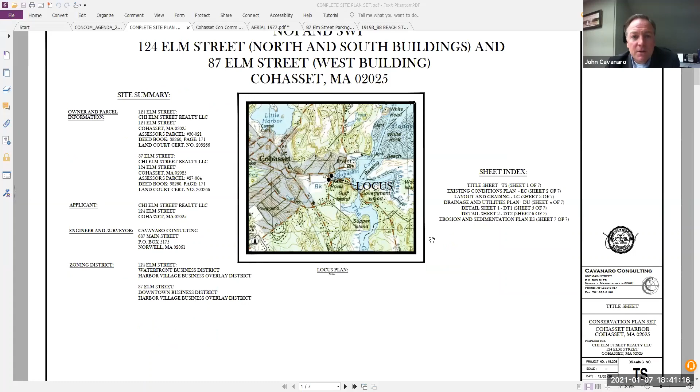Thank you very much, Adam. So, Jeff, if you'll allow me, I'm going to share my screen and pull up the site plans. I assume everybody can see that okay? So I'm going to walk through the site now.

Before we begin, let me ask you one question: would you prefer that we held off our questions until you finished your presentation? Your presentation may get thrown about quite a bit if we throw questions at you whenever they pop up. How would you like to play that? I would appreciate that, Mr. Chairman, if that's the will of the board.

That's fine. What I'll do is go through the plans, and then I'll also ask Jen to go through the landscape plan. After that, we'll return to myself, Adam, or anybody on the team for questions and answers, if that's okay. Okay, I'll walk through it.

Sorry to interrupt you, Justin Pimpare. Just a quick procedural question: I assume the set of plans in front of us tonight are the latest set of plans also in front of the planning board. I haven't been following that whatsoever, but I assume this plan is the latest and greatest plan in front of all boards at this time.

This is the latest and greatest plan that's been prepared with respect to conservation. Principally, almost all of it has been in front of the planning board and the Board of Appeals, but those plans were submitted prior to this application being submitted. Some of it has probably been updated since, because this application was submitted after the fact of those two, but generally they're conceptually the same as far as the proposed work.

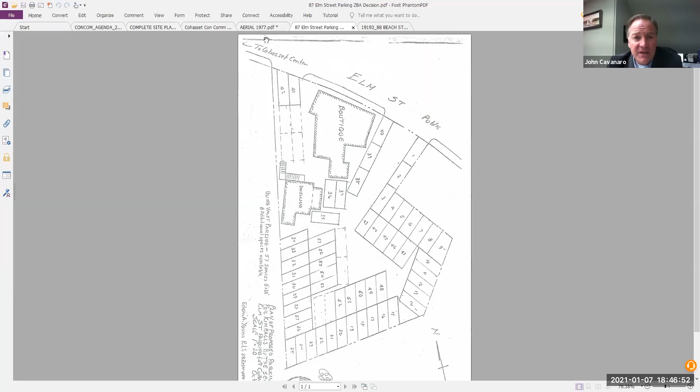In researching the active special permits, we found that 87 has had a parking plan put together to identify the capacity of its parking for the hotel and the adjacent properties under common ownership. This is the current parking plan that's part of the special permit associated with 124 Elm, because these properties have been together for quite some time, and it explains the configuration of what's out here.

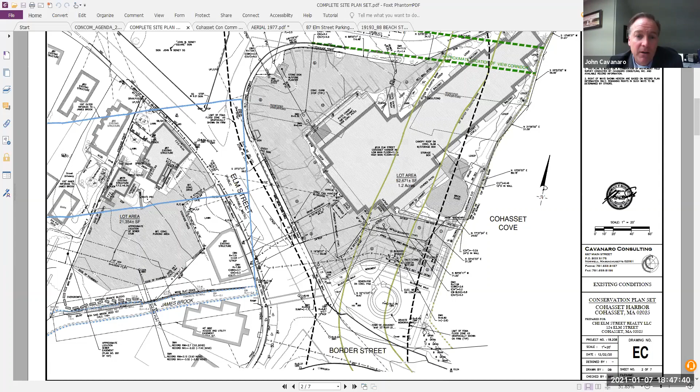So that's the existing facility. As Adam said, this is a redevelopment project. These are two highly developed, highly paved, large capacity parking lots with mixed-use buildings.

What we're proposing, I'll show a plan that's a little busy, then move to less busy plans. I wanted to show for perspective the overlay of the existing buildings with the proposed buildings on the same plan, to show the real crux of what this proposal is looking to solve and create—leaving the property in better shape environmentally, functionally, for public space, and for stormwater management.

Right now we have an existing building that primarily occupies the 100-foot buffer zone. You can see this is the 100-foot buffer zone, and the majority of the building sits within that footprint. A large portion is within the 50-foot buffer to the coastal bank.

One of the driving factors with this village overlay district, created through recent town meeting, was to create a mixed-use environment here, and also—one of the tenets of the bylaw change—was to open up a view corridor along Margin Street, which is currently blocked by the existing building footprint. So the idea was that anything developed here should keep in mind that an open view corridor to the ocean would be part of the proposal, and that drove the layout of some of these buildings.

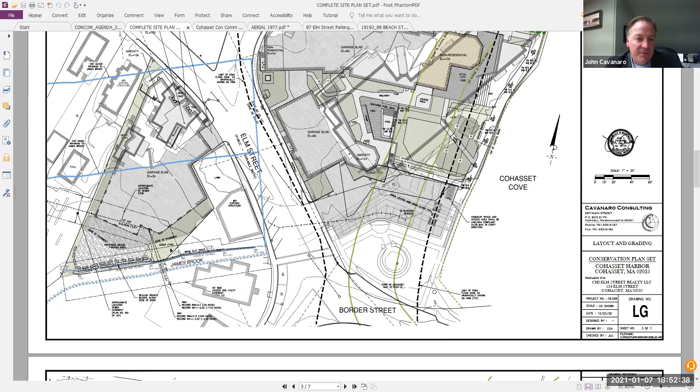So all of this pavement is now uncovered, which provides the ability for pollutants to roll down into the James Brook. Similar to 124, we'll be putting all of the parking for the residential units under a roof, with only a few parking spaces in the back of the property to maximize parking—not to the extent I showed you in that special permit drawing with the valet—but we still want to provide parking for the mixed-use commercial tenants and activity on both properties.

So what we're doing is taking advantage of some of this back area, but still pulling back the pavement on both the westerly and easterly lines and adding landscape, which Jen will talk about in more detail in a minute. So the proposal at both sides has essentially been to reduce the building footprint at 124, reduce the impervious surface, reduce the amount of open air parking, and increase the amount of open space and landscape.

At 87, we are increasing the building footprint, but substantially reducing the amount of open air pavement. So we're essentially trading what we call polluted runoff with clean runoff. Instead of having vehicles parking outside with the potential for contaminants to wash down into the James Brook, we're eliminating that impervious surface and putting in roof with crushed stone at the back end of the lot to provide some pervious surface.

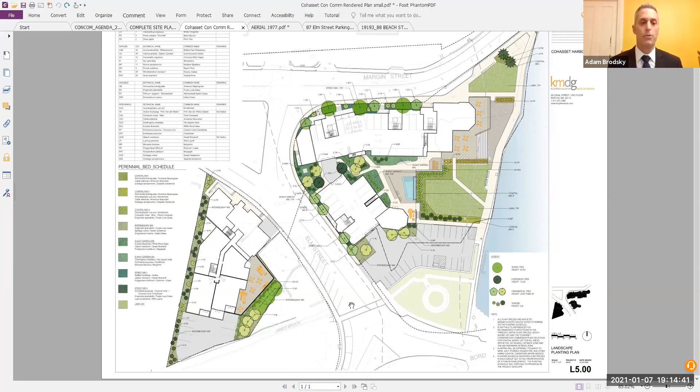This is historic filling from the 1800s and early 1900s, and it's been there decades and decades. There's still loads of creosoted logs and piles in here. I just wonder what impact that might have on the harbor once it starts to get disturbed, once the loading is changed on the property. Are you going to be lighter or heavier? Are you going to see some compaction? What are the consequences of that?

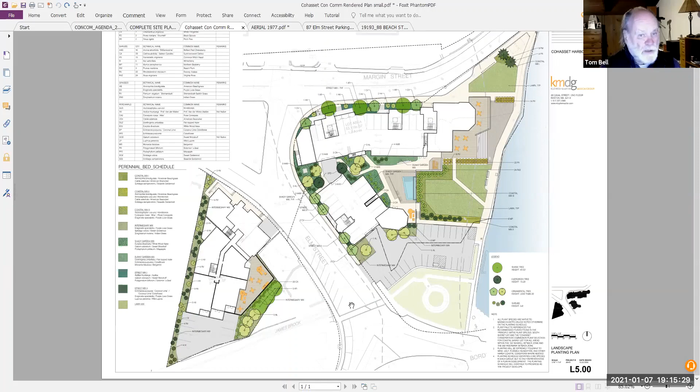Do you have a geotechnical study of this by any chance? Yes, a geotechnical report was prepared. Great, so you must know something about the subsurface. Well, as I mentioned, there were borings done around the existing parking lot, not the building, since it takes up a large portion of the lot, as you saw on the previous plan. So what they found was actually ledge around the parking lot. Ledge or stone fill? How do you know? No, it was a refusal — they hit some large refusal.

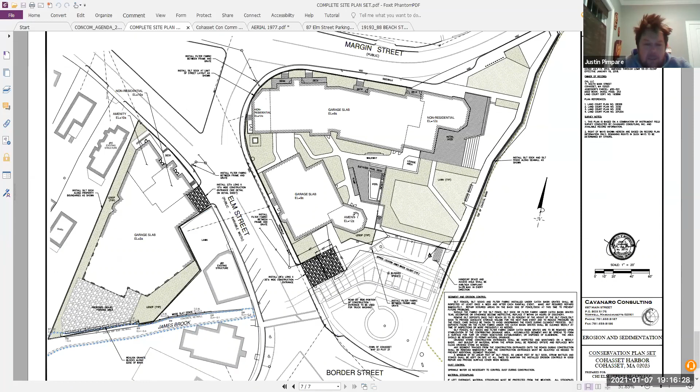This is Justin Pimpare. I had a question on the elevations here. As you mentioned, there were some test borings done around the parking lot. Maybe we could switch off this planting plan and go back to one of the plans that talks about the garage elevation. I believe looking at the old plan — I can't read this because it's so far away — but it looks like the garage slab was at about 9 feet.

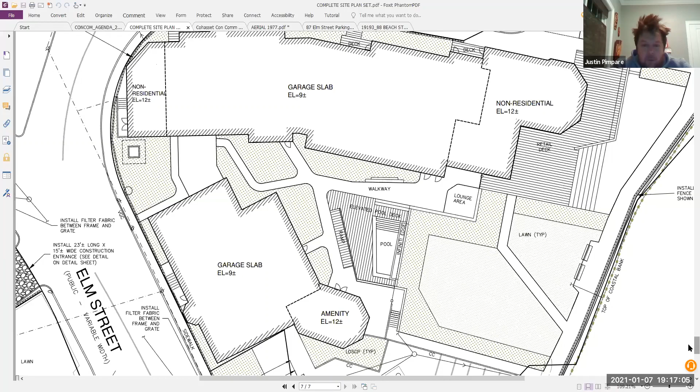So as I understand looking at the plan here, during the demolition of the project and the removal of the current building, which now has a basement, there's going to be some excavation done, and clearly there's going to be a need for some fill to come in. Do you know what is the actual elevation of the top of the walkway now, or the existing brick patio area that's currently in place? My question is how much fill will be needed underneath that garage slab at 9 feet, and what is the actual current elevation now?

Again, as I assume, there are no basements — the only excavation really is for the removal of the basement area after the demolition of the building. Is that correct? That is correct. So the garage slab elevation is going to be closely matching the existing ground elevation. The existing ground of the parking lot ranges, but essentially the grade over at the town parking lot will remain the same.

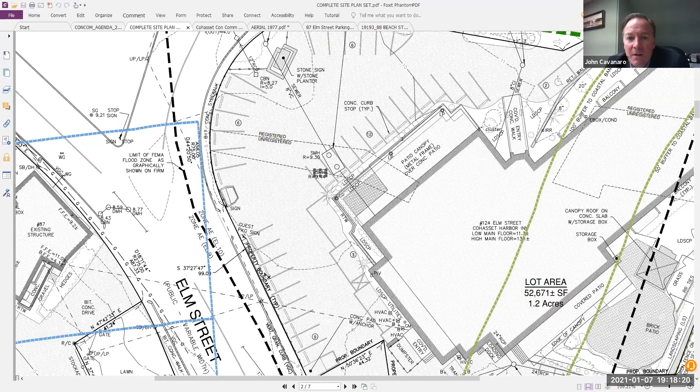Okay, so no changes to that. The curb cut will remain the same. And then as we work our way up around the property, this comes up in elevation to elevation 9 — this is where the top of the garage slab will be, pretty much sitting on the existing grade as far as elevation. So there'll be a cut on this side because the ground slopes up as it comes up Margin Street, so this will be a little bit of a cut.

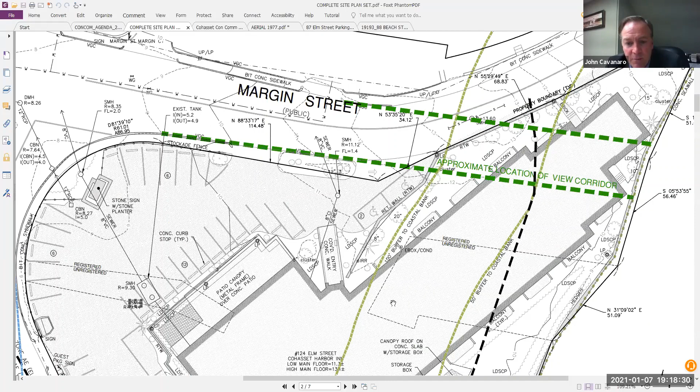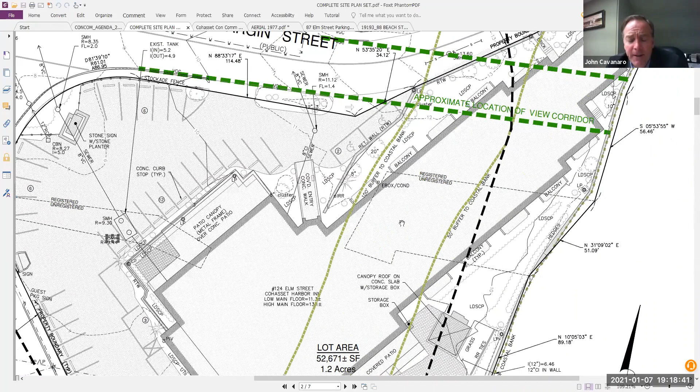This will be pretty much at grade, so there's not a lot of fill being brought on site, other than for when we take the building out. Let me back up — this grading, I just want to show some grading. So although there's a need for some fill to fill in the actual basement area, you're really not even going to have enough. You can't use your cut for your fill because the cut is mainly 4 inches or so of pavement, which I assume will be completely hauled off site, and then you're almost down to grade for some crushed stone or crushed gravel to lay the slab.

This is where the grade will be coming up, this is where the existing building is. So we'll be bringing the grade up and have the walkway essentially level. It'll pitch slightly away from the coastal bank, and then the grades will come up to match the street elevation, tying in to the existing road network and from the seawall. So we're not talking about dramatic changes — it's really just to meet. We're keeping the garage slab pretty much at the grade of the existing parking lot, and we'll just be grading from the seawall to match the first floor elevations of these, which are above the flood.

Right. And over here, we're sort of doing the same thing. We're keeping the garage slab pretty close to what the existing parking lot is, and it'll slope up to meet Elm Street. But there's no fill or cut going on back in here at all.

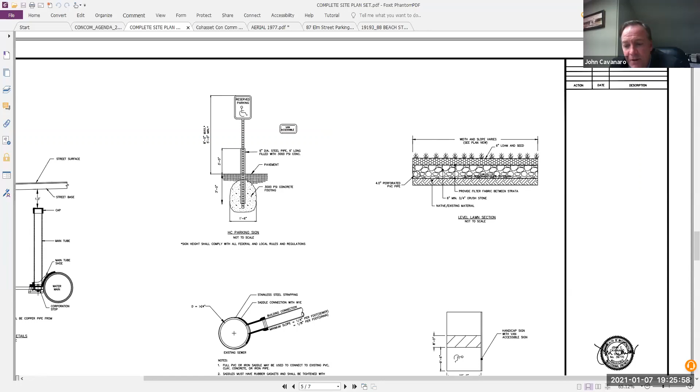So during heavy rain events, it doesn't become a slushy field. Exactly, and here's the level lawn section we've added, with lawn on top, and then crushed stone with a perforated pipe that will drain this area.

When this fills up, it will overflow into the drainage system on site that collects and connects to the existing 12-inch outlet that daylights into the wall. So we're not adding any new outlets to the wall, we're just reconfiguring the existing drainage to get it there, and adding this infiltration area to provide a little bit more.

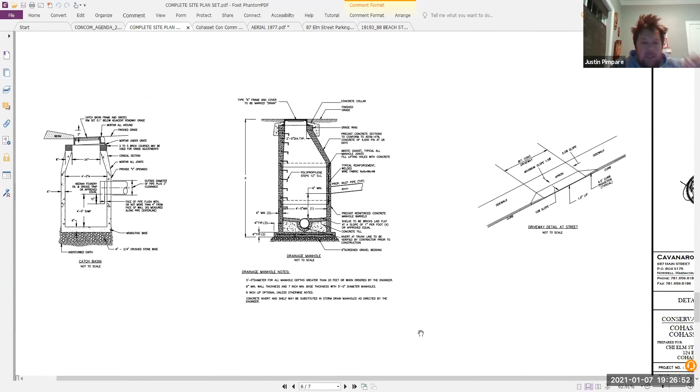You also had a schematic of the drainage manholes, and I had some questions on that. Sure. If I'm reading that correctly, is that a 5-foot diameter manhole at its peak, and how deep is it? It's 4 feet.

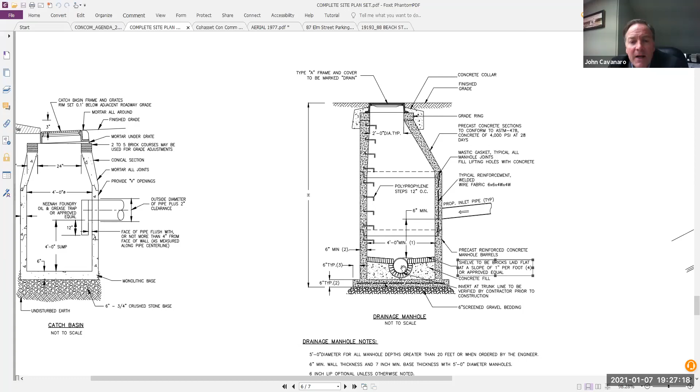So an individual could actually get down in there if need be? Yes, that's hence the manhole. And how deep are those? Well, they vary, it depends on where the specific drain elevation is, where the invert is. But these are typically about 6 feet in depth, though they vary. Catch basins can be shallower, it depends on where the outlet drains are.

So are those existing drainage manholes now? No, this is a detail for a new drain manhole, for the new drain connections we're proposing on site to collect the network of piping.

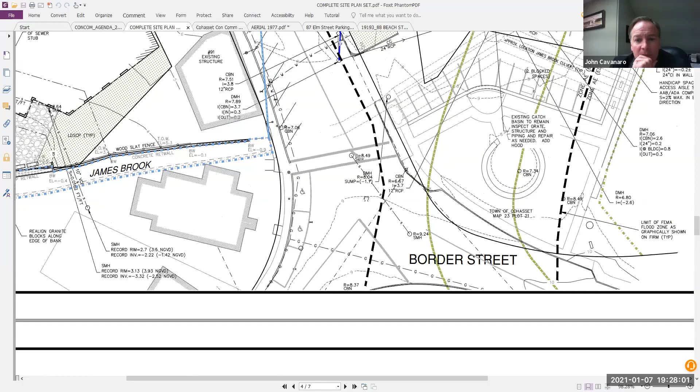Can you just describe on the plan where exactly some of those manholes are? Yep. So we'll have one here and here, these are the DMHs, the drain manholes.

So we'll have a series of small inlets to capture runoff that comes off of this walkway. We'll pick that up with some small area drains, and then connect the roof drainage to that so we're not daylighting a lot of roof drainage into these public areas. We want to connect the clean roof and put it into a pipe network.

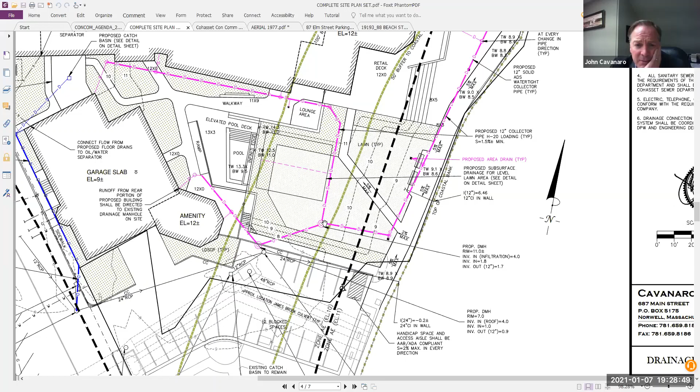Where we have pipes that connect with one another, that's where you want a manhole, so you have a good clean junction chamber that you can access and clean out if necessary, and get access to the pipe networks. You don't want to link these up with catch basins when you can avoid it, so at the primary junctions you put manholes.

So you're saying the drainage system in purple is collecting clean runoff. Yeah, there's no pavement where we have vehicular traffic or anything like that.

So to switch gears a little bit to talk about the pavement and the manholes or catch basins in the pavement area, can you talk about that? Sure. There's an existing catch basin here that we've identified, we want to make sure that's adequate.

Inspect that, make sure there's a hood for stormwater water quality. Anything new that we put in gets a hood to provide an oil water separator mechanism. We do have one catch basin here, in this open air area between the two buildings that connects the parking, so we'll have a catch basin here.

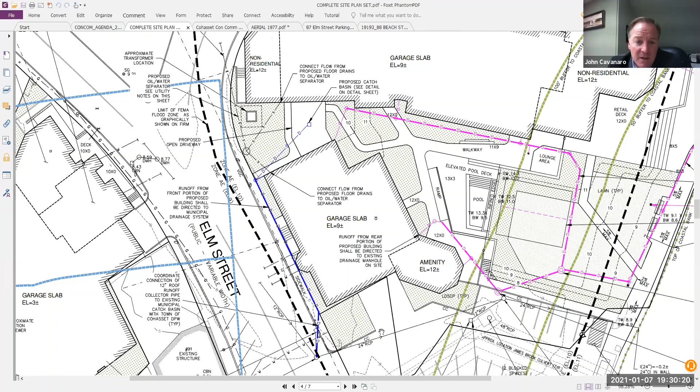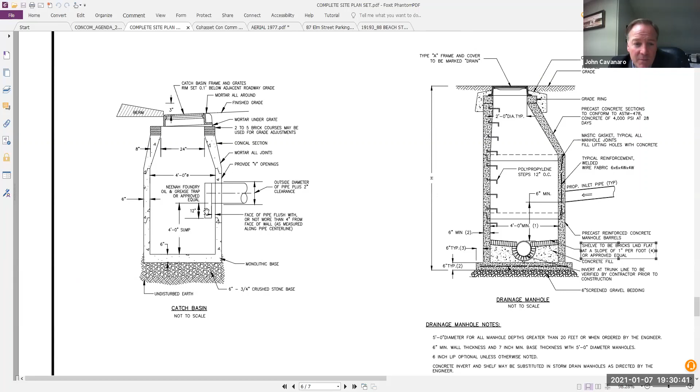The catch basins we've designed are deep sump catch basins, so they have a 4-foot sump. It's called a deep sump catch basin, and these are the hoods. So water flows in, sediment collects—that's called primary treatment—and then as the water level rises, it drains into the pipe.

But if there's any level of grit, grime, or oil, that will float to the top, and the clean water will go up the hood and drain out the pipe. That's the reason you have these hoods on an outlet to a drain structure. So you have the sedimentation that collects here, and the oil.

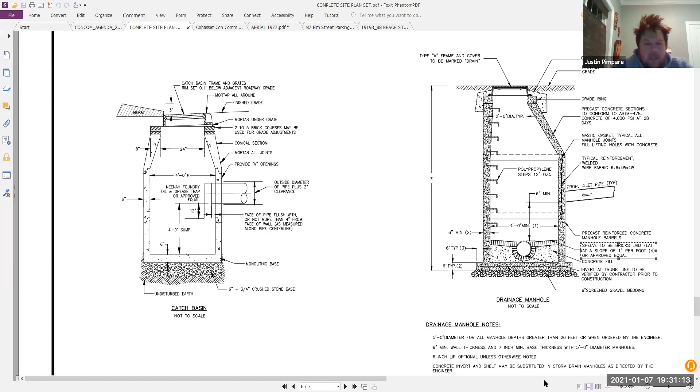Would you happen to have an O&M plan for something like that, or is there only a plan that kicks in when there's catastrophic failure and there's backup and/or overflow?

No, so we have an operation and maintenance plan that's submitted as part of the stormwater permit, but all these structures will need to be maintained and cleaned out on a regular basis. Just like a small outdoor parking lot, they need to be swept and maintained, which they will be. The benefit of mixed use projects is that a lot of attention is paid to the facilities because you have both residents and non-residential use.

I guess sticking with drainage, you mentioned the oil water separator, but I also saw on the plan an oil and grease trap. It looked like floor drains. Can you show that and describe it a little bit? Yeah, so for anything inside, any drainage collected inside a roofed structure gets sent to an oil water separator, separate from what you'd have on a catch basin for an open air structure, which drains to the municipal sewer. So that doesn't get collected and drained to the stormwater system, it gets more treatment and is sent to the municipal sewer. So the garage slab floor drains go to the oil water separator and then off to the municipal system.

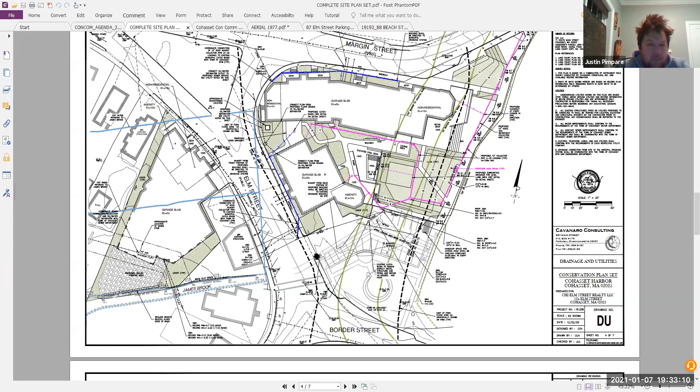Correct. Is that the same for across the street as well? Yes, if you have any drains inside a building. Is that on the plan across the street? I say across the street so it's easier for me to reference. There, where your cursor is, correct? Yeah, there's a sewer connection here that would get connected into this. Can you blow that up a little bit, John? Sorry, it's just hard to see there.

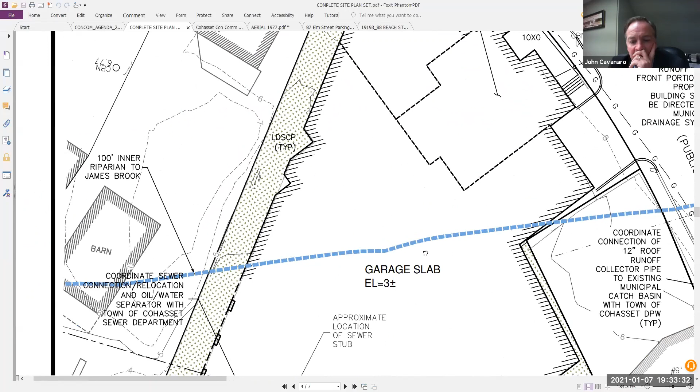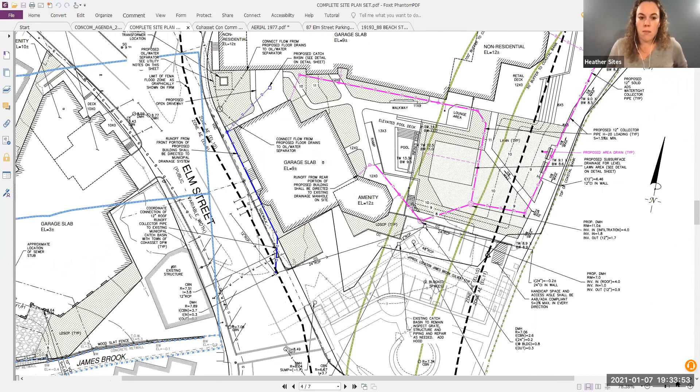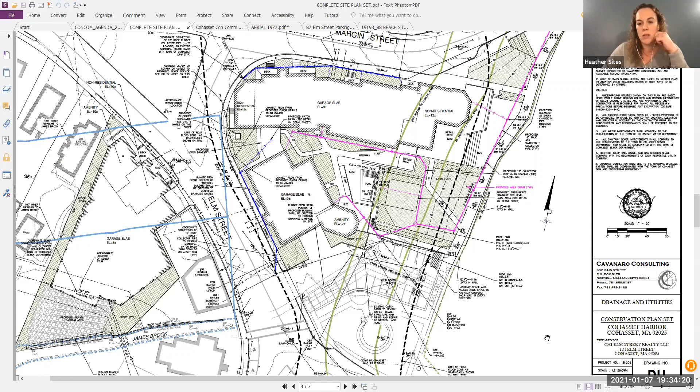John, regarding the stormwater plan, I know you mentioned Weston Sampson peer reviewed it before the planning board. Is the version of the stormwater plan and report submitted to the Conservation Commission pre-peer review or post-peer review? Post-peer review. Okay, excellent, so you have the most current version. Would there be any way to get the Conservation Commission a copy of the Weston Sampson peer review memos or letters? Sure. Okay, yeah, because I think it would be helpful. We certainly don't need to relitigate anything that's already been discussed or reviewed, but it would be helpful to have that information to look at.

Did I hear the word litigate? I hope I didn't hear the word litigate. I can't help it, it's part of the natural... It's part of your character now.

Exactly. John, can I ask you a question, getting off all the sewers and all that? You and I have worked together for 3 years, and I've never heard of something called a degraded area. That's a new term you're throwing here that I haven't run into before. What is that? It's really a term associated with working in a riverfront area, essentially synonymous with redevelopment. So this is a redevelopment project because we're working in areas that have already been developed or degraded. It refers to the property over at 87 Elm Street. As we talked about earlier, this has historically been a parking lot. So we don't have a virgin salt meadow, we don't have a field of trees, we have...

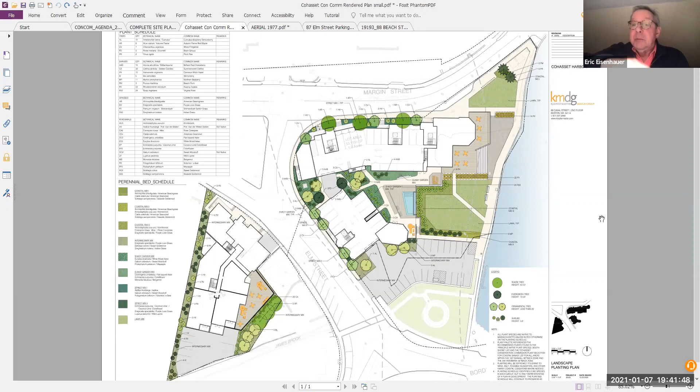Various things have taken place behind it and on top of it, John, but the wall is there, has resisted and put up with hurricanes and high waters and everything else—so it's a solid thing. And our project to put in a salt marsh grass frontage, which we thought was what was originally there, like you find in a lot of harbors—we couldn't find any evidence there was any salt marsh in this area, because it's probably been pushed way back.

John, we've talked about the unknowns with the excavation, which is obvious with most projects. Is there a demolition plan in place, or an excavation plan, construction plan—I guess I'll call it a demo plan for the project here? So nothing different than what's in this package—there's not a demolition plan per se. Is that normal, John, not to have one? Well, I guess every project varies. I'm sure with the final building permit plan set there'll be more details, and that will likely include a demolition plan.

I would assume that all of the pavement and building structure, et cetera, is going to be hauled off-site to a location. So I think it would be prudent to have some type of demo plan. It doesn't need to be elaborate, but some form of a demolition plan to ensure that the digging, the excavation, et cetera, is done accordingly and is hauled away, trucked away, in compliance with wherever it's going. I don't need to know exactly where it's going, but it would be good to have a demo plan on site.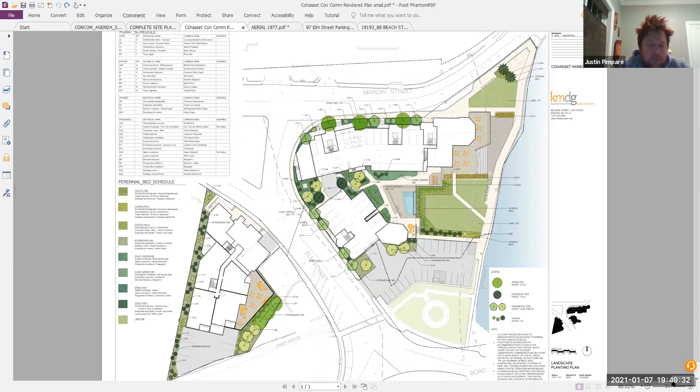And then my other question was with respect to the planting plan, going back to Jennifer here. Thank you for the in-depth drawing and the color coordination, etc. My question is about the planting size for some of the trees - I didn't see that mentioned. I see the different species, which is wonderful, but is there something with respect to size, whether it be 1 inch caliper, 2 inch caliper, 8 feet, 10 feet as far as height goes, etc.?

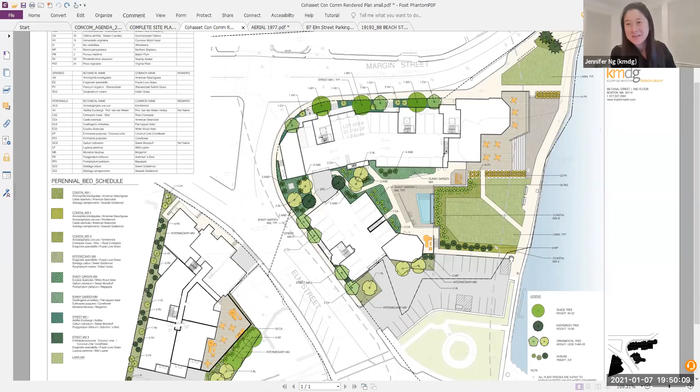So I'll throw that out to the landscape architect. We can certainly circle back with that information - we didn't provide that in this round. I have some desires for size, but should probably talk with Ted and George about it before committing publicly. I think in the hope of moving this project along, plant sizes and plant quantities are important. Sure, of course.

John, two other items I think would also help with this. I do think the seawall is an important feature here, and it seems that concrete extension is just something they put in for security or whatever - maybe they were getting floods at some time, I'm not sure. But it would be useful to see a couple spot elevations at the top of the seawall itself, not the extension, but the historic seawall, so that we can see how that relates to the project overall.

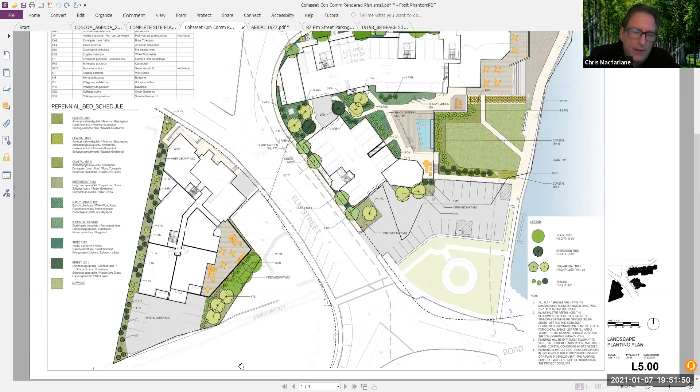The other thing is the parking at the rear of 87. The planting plan shows the spaces, you showed us kind of an overall layout, but it is concerning that although there may have been a time when the asphalt went down to the edge, we now have a condition where you have overgrowth down there. I'm not sure whether or not there's asphalt under it or not, but it does go right to the edge of James Brook.

I think it's worth understanding more how that particular area figures into the overall parking scheme. Obviously from my perspective, the least you can do in that area, the better. So if you can show us a layout of how the parking works there, so we have a better understanding of exactly what you're trying to accomplish.

Okay, they are shown in this plan, but we can further articulate that so that it's clear. And if you just slide down again - let's just call it 1, 2, 3, 4, 5 - 5 on the one side, 2 on the other. So correct, do those 7 spaces, are those required to meet the parking requirements for this project?

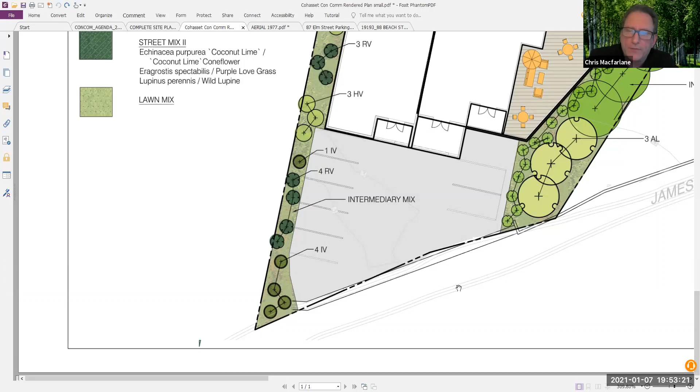Yes, these are commercial spaces that meet our demand for the overall project. I'm sorry, when you say commercial spaces, what do you mean by that? So these are spaces that will be used - the spaces inside the building are for the residents, there's one residential space outside in this area, and the rest will be used for the non-residential use, so the commercial use.

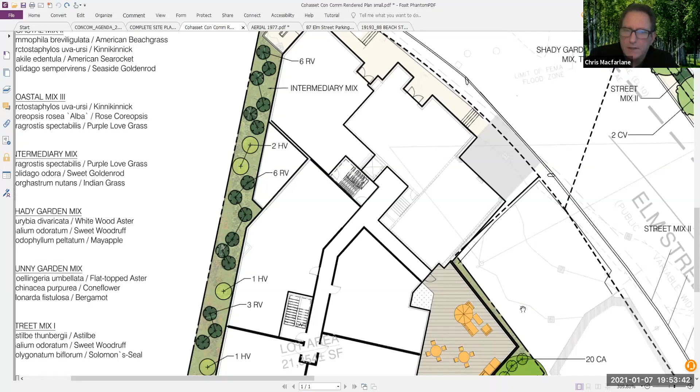Is this parking one story below street level? Yes, not even a full story, but it's pretty much at grade what's there today, but it's below the street level. Well, it's quite a bit below street level, right? Well, it's 5 feet.

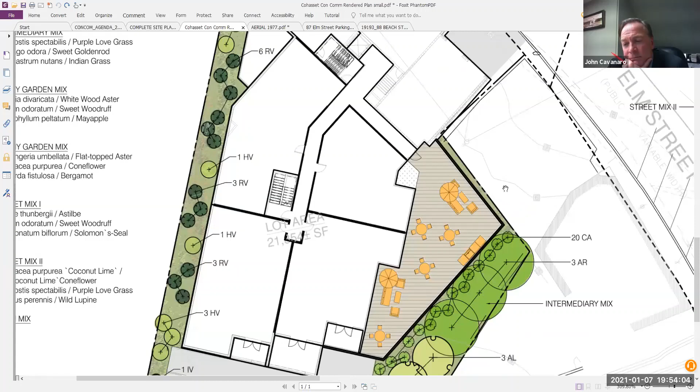And is that parking coupled with the parking that's shown in the street, or is what's in the street not part of that count? No, nothing in the street we can use for the count. So you're saying you're required to have 1, 2, 3, 4, 5, 6, 7 spaces for this commercial development? That's correct, 1, 2, 3, 4, 5, 6, 7 spaces. Yeah, but you said 1 was residential. Right, but it's all part of the parking count. I was just specifically saying what these spaces are designated for, but these spaces are all part of our overall parking count. Mm-hmm, so we need these spaces. Okay.

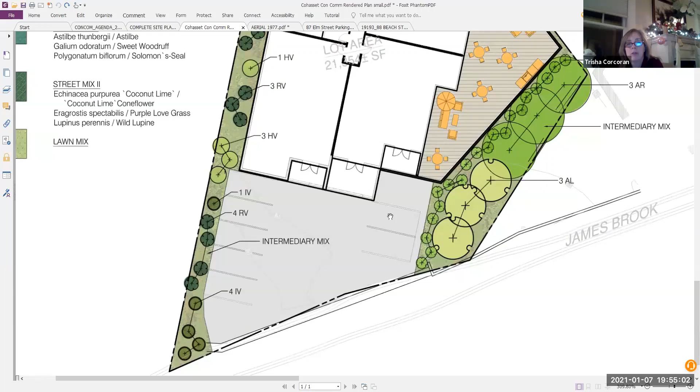John, I have one question just for my understanding of the project. From James Brook, you said it's diverted underneath the street, going over to the gate under the parking lot on Elm. And the parking lot is the public parking lot that it's underneath, is that right?

Both, actually. This is the property line that goes through - this is the public side, this is the private side, but it's essentially a shared parking lot. Okay, that's what I wasn't understanding.

And is that getting expanded more than it is currently? It's hard without seeing - we're adding a couple of spaces to this, but essentially we're keeping this parking the way it is, and these spaces are all there. We're adding a couple spaces to the end.

Okay. And how is it diverted underneath? What is the structure that's diverting the brook under? Culvert, I guess - there are 2 large concrete culverts, essentially large concrete pipes that carry the water underneath the street and to the tide gate structure.

Thank you. So John, is that just one parking place with a handicap, with the striped area being a handicap unloading area, or is that a space as well? That's a space as well.

This is probably the best, just to zoom into this parking. John, I will applaud you for putting in the sign for the handicap spot in the schematic, mentioning that the actual sign will be set in a 3,000 PSI concrete footing. So thank you for that.

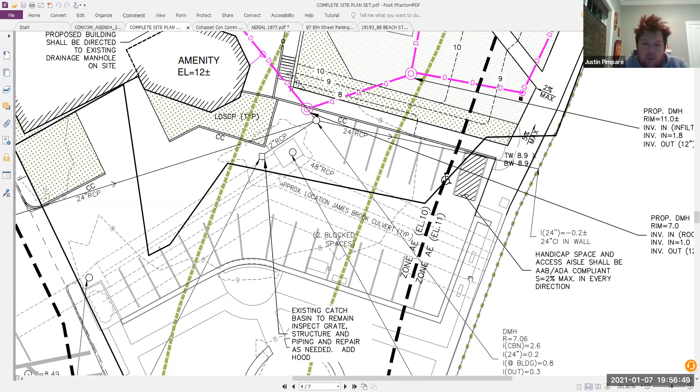You're welcome. So there's no handicap spot over here today, so we're adding a handicap accessible spot here. So that's what the striping is. These 2 spaces over here are taken up because they're generators.

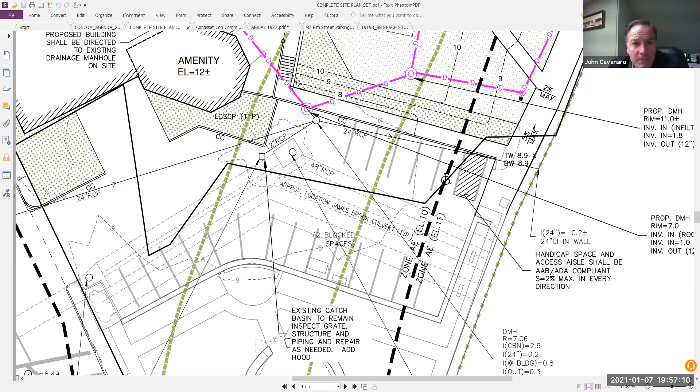I'm going to go back because sometimes these plans are... Are the generators going to stay in the area as is? Yes. Okay.

Even though that space is bisected by the property line, that particular space is part of your parking count? Yes, the space is. Is there an agreement with the town for that?

So the town is aware - before we started this project, the selectmen were made aware that the town right now doesn't have an easement over this private property for the James Brook and other use. They essentially don't have access legally to these spaces. So it's an agreement on easements, and this was voted on by the selectmen, I think it may even have gone to town meeting, that an agreement will take place between these two parties to work out access between these two lots.

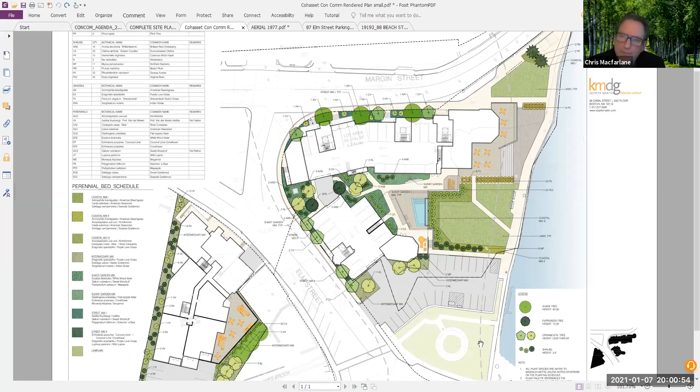No, it's not 5:30. We could attempt 6 o'clock, but right now I don't have enough information to decide how long this is going to go for.

I think for the moment, all we're legally required to do is continue the hearing to a certain date. So if we continue the hearing to the 21st, I'd leave it up to Angela and or Jeff to discuss with the commissioners on a starting time, but to throw that out there, it would be an early starting time, potentially 5:45, 6 o'clock. That'd be my recommendation.

Okay, and we'll be meeting on Tuesday at 8 o'clock, I believe, in front of the hotel. John? Yes. Jeff? Yes, Tuesday morning at 8 a.m. Okay, great. Anything else, John?

That's it. So we'll plan for a site visit next Tuesday at 8 o'clock and a continued hearing for the 21st at 6 o'clock. And thank you very much for the effort and time you and your team have put in.

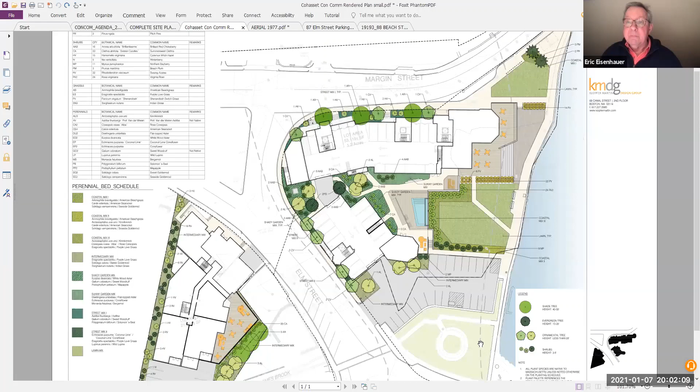By the way, in front of me now I have a letter from residents and abutters of Cohasset Harbor commenting on this project. I'd like to thank them for the thoughtful letter. For good or for worse, it's the kind of thing we need to have because it keeps us in touch with local sentiment. And if any of you haven't read it, I believe it's on the OneDrive. But to those people who spent the time, put it together and signing it, thank you very much.

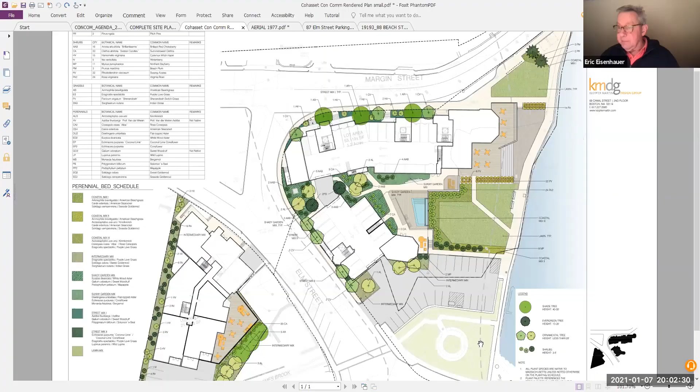Okay, John, thank you. Next project. Thank you, thank you. Let me see. I think I'm next. Are you next, John? Yes, I'm getting my 88 Beach. Can't get rid of me. Already read it in. Okay, John.

Okay, if I share screen, I'll pull the plan up to keep things rolling. Short and sweet, this is a continuation from the last meeting, and we were asked to do 2 specific things. This is a project at 88 Beach Street, and it includes a ramp and a float, and it includes the reconstruction of a garage that was demolished by some tree damage. So the first item I was asked to do was to revisit the location of the ramp and float.

Because we had originally planned to relocate some boulders adjacent to a patch of salt marsh, Division of Marine Fisheries suggested those boulders remain in place if they didn't need to get moved. The discussion was, let's leave those in place and let's consider rotating the ramp and float to avoid that. And that's what we did. So we rotated the ramp and float, kept it the same dimensions, made notation that the float will have skid boards on it in accordance with the Division of Marine Fisheries letter. That was the change on that end.

Down at the garage end, we were asked to do some more survey to locate existing vegetation in the area. We located 3 trees, one of which was right on the 100-foot buffer, one is outside. The 2 closest to the building do need to get removed, the 3rd can stay. We also identified a 6-inch cedar tree that falls within the alignment of the proposed driveway. So the plan is to replace those 3 trees within the 100-foot buffer outside the 50-foot with 3 trees that we identify on the plan.

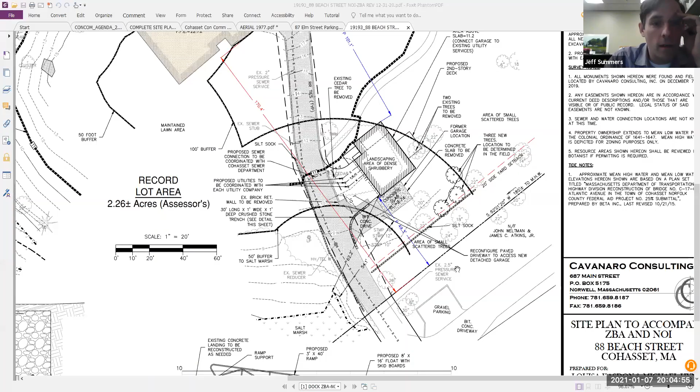John, would you mind sharing your screen and the plan for us? I apologize, sorry, oh I thought I was sharing the whole time. I apologize. No, that's okay. I can bring that up. Oh good, oh it's up. I sincerely apologize, I was talking along and pointing to this plan as if you were all seeing it. Yeah John, can you or Jeff magnify that a bit? There's no way I can understand what's going on there. Sure, is this okay? Yeah.

So this is the proposed garage. We were asked to locate trees within the vicinity and any vegetation within the vicinity of the garage. We located these 3 trees, 2 of which need to be removed, and a 3rd, it's a 6-inch cedar tree that's located where the garage's new driveway would go. This is sort of a patch of forsythia, call it overgrowth, sort of shrubbery. A large portion of that would also be removed.

What we're proposing is to put 3 new trees in an area where there's quite a bit of trees out here, but there is a patch that's open. We would like to keep them at a fair distance from the building because the reason this fell down in the first place is because these trees fell and destroyed the building. John, do you have something for size of trees and type? I don't, but we can certainly agree to a minimum 3-inch caliper native oak.

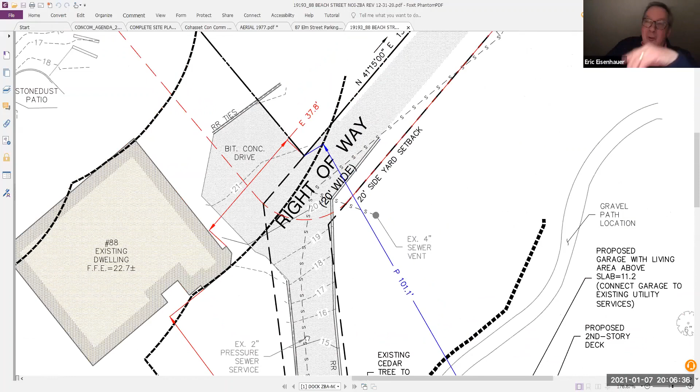I would say 3 to 4 is probably a good size. Yeah, native oak, that's fine. Eric, if you say 3 to 4, you get 3. If you want 4, say 4. Okay, 4 to 5, we get 4, right? That's right. Is it, John, 4 to 5 it is, right?

Is it feasible to use a tree spade to move some of those trees you propose to cut? They're too big. Is it feasible to use a tree spade to move those? No, unfortunately, these are very large.

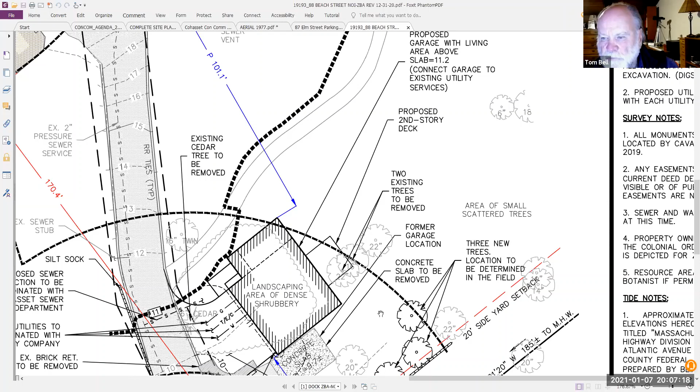Yeah, maybe the cedar, maybe. But the cedar won't do well if it's moved. So, Tom, these are 22-inch trees. I guess I don't have a good feel for how tall they are. I've had trees as high as 15 feet moved with a spade, but if these are much more than that, then these are taller than that. The cedar's shorter, but we fear that, as Chris said, they wouldn't survive. They're large trees, Tom.

The other item that we did was we rotated the ramp to avoid the boulders, as I previously described.

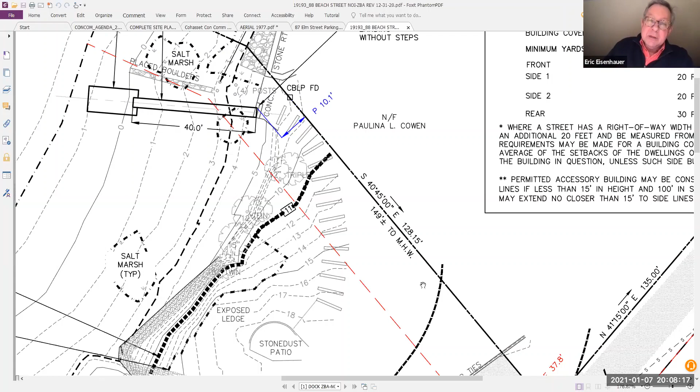And your salt marsh grass, we're going to forget about that, right? We're not going to touch that. There's a little patch here, but this will span over that. But John, there was some literature that came out along with the meeting two weeks ago, that salt marsh grass migrates up and down the bank depending on the time of year and various other things. So it may be there right now, come back in 10 years it's probably 10 feet to the left. So it's very hard to build around a fixed position for the salt marsh grass, because it's rather nomadic and moves where it wants. So we'll do the best we can.

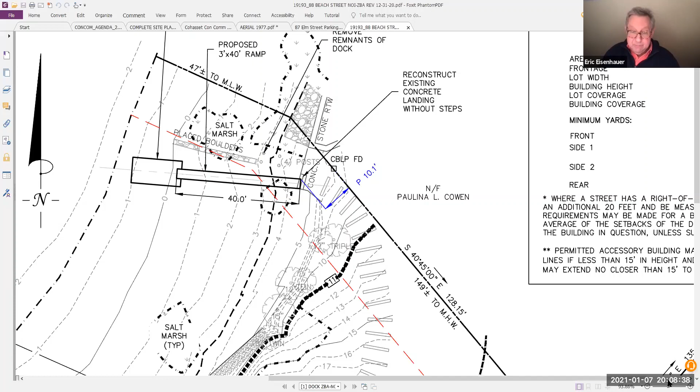Okay, anything else, gentlemen? Do we have someone want to make a proposal? Motion? Eric, I would just suggest, I don't think there's anybody in the audience that has any comments on this, but just in case there is, if they could just answer or ask in the Q&A. I haven't gotten any comments all night.

One other thing too, I think with this there should be the condition that the 3 trees be of whichever caliper it was. That was 4 to 5 inches. And I know John said oaks, but I don't know if we want to just leave it open to some tree from our approved list in case what they're proposing isn't available, or if the homeowner changes their mind and wants something else or to mix it up.

John, the existing trees we're taking out, they're conifers, aren't they? They are. I think for lack of anything else, we ought to replace it with something from the conifer family. That's what's indigenous there, and that's part of the local flora.

That would be fine. Are we all set then? Hold on, John, you said that the dock is on skids. Is that, or the ramp is on skids? Is that right, it's not going to be anchored down? Correct, there's no piles. That's correct in it, yes. So they're going to hand do it. Well, actually, sorry, no, that's a ramp. It's a ramp. Okay, no, I'm good. Thanks. Yeah, there's nothing.

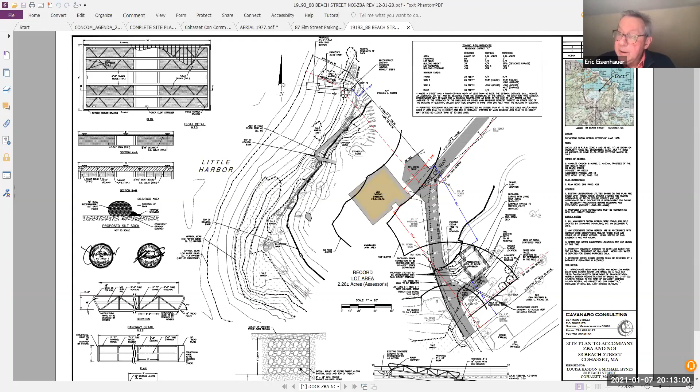Second. We'll vote on that, on the issuance of the variance for 88 Beach Street to work in the buffer zone. Kathy Berrigan, yay. Eric Eisenhauer, yay. Trish Grady, yay. Chris McFarland, yay. Jay Pimpare, yay. Maryanne Weatherald, yay. 6-0 in favor.

Okay, Jay, you mentioned you had another one to make? I think there's still a stormwater permit here. So Jay Pimpare would make a motion to issue a stormwater permit for the project at 88 Beach Street.

Anybody second? Second. Okay, we vote on that. Kathy Berrigan, yay. Eric Eisenhauer, yay. Trish Grady, yay. Chris McFarland, yay. Jay Pimpare, yay. Maryanne Weatherald, yay. Okay, that passes 6-0.

Great, thank you very much. Hey John, before you leave, if this is okay, I should have mentioned this when we were talking on the previous project.

While most of the plant species seem appropriate, some of them are not available. Unless they're talking really small pitch pine, you can't buy pitch pine of any size. So I'm just putting that out as a warning to your landscape architect, that I'll have them go through the list and make sure that everything is available. Yeah, okay, thank you, thank you.

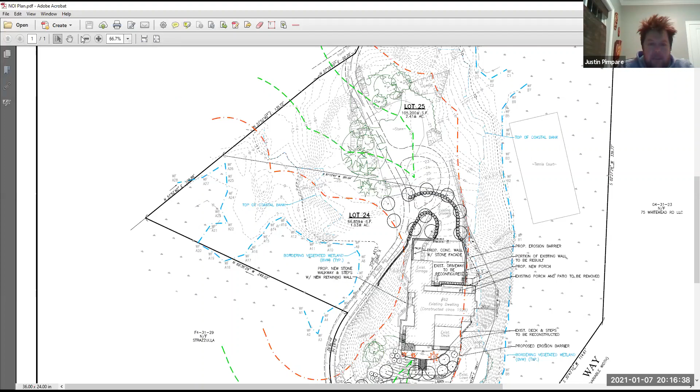Jeff Hassett, would you mind just blowing that up a little bit please as you describe that? Appreciate that, thank you. Sure, so this garage, and then their primary driveway, their historic driveway, comes in here, and previously they parked down at the bottom of the hill and had to walk up to the house. So for the previous owner, they built this garage and a driveway up to it.

So the wetlands on the property include BVWs, which are shown in blue, the 50-foot buffers in red, and the 100-foot buffers in green. There is floodplain on the property, although all the work is outside of it. Because there's floodplain, there's technically a coastal bank, although it doesn't function as one because this is not a waterfront property. It's set back from the water. There are houses in between this house and the ocean or the harbor.

So I'm going to run through the work. This I kind of already started to touch on, but the purpose of reconfiguring this driveway is to get 2 additional parking spaces right here.

So they would construct a wall here, a concrete wall with a stone facade, adding a little bit of parking. As part of that project, currently there's a wall that basically follows the 50-foot buffer coming all the way up here and tying into the house.

There's a porch here and also a patio. They're going to remove that patio, remove this porch, and then reconstruct this portion of the wall, which brings it just outside of the 50-foot buffer, where currently it's in the 50-foot buffer.

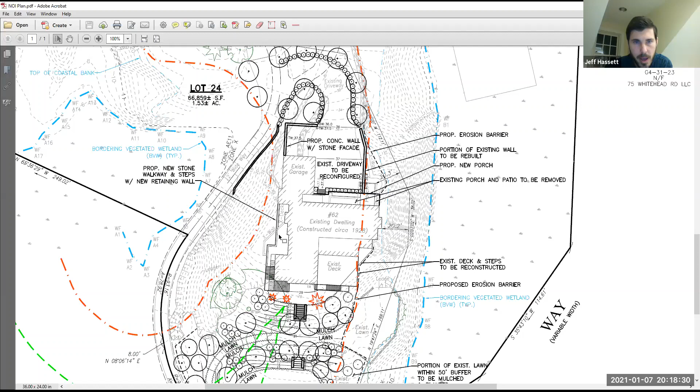The next part of the project is this portion of the house here. It's currently a deck and a retaining wall with a patio inside of it, with steps going down. That is proposed to be reconstructed: remove that wall, construct a new wall here, the more bold one, and new steps down to the lower level.

On this side of the house, the deck goes pretty substantially into the 50-foot buffer currently, this corner here. When they reconstruct it, they're going to square it off like that, so other than a sliver here, it's outside of the 50-foot buffer.

The other part of the project is this area in here, which is currently lawn with a few mature trees, and they're proposing to regrade that and landscape it. So the majority of that lawn will now be mulched and planted with trees and shrubs. Basically they end up with a lower lawn area here, sloping up to kind of a walkway through this area, and another mulched area around the house.

I'll note that I am showing the erosion barrier, and I am showing it in the 50-foot buffer partially. The only reason I'm doing that is there isn't any grading proposed, but they are proposing to convert that lawn area into a planted area, so I would want the barrier around it.

The only trees to be removed are 3 small trees along the house. Otherwise, all the trees remain, and they're proposing quite a few trees, 31 trees and 103 shrubs, all of which will be native and approved, part of your approved list.

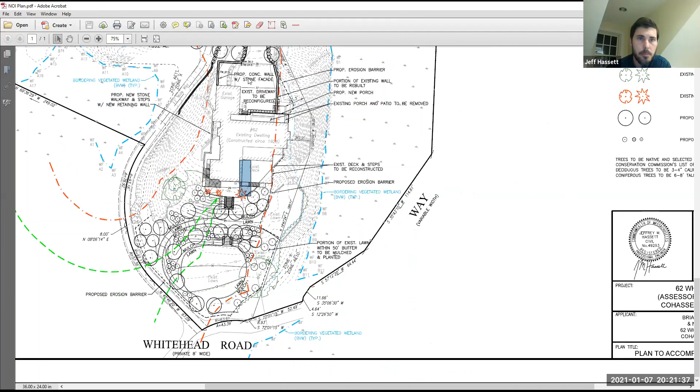So all this work that they're proposing with the additional driveway is pretty much an existing driveway, except for this bump out where they're going to put that wall, on the left-hand side there. Where that wall is going to go over is two existing large stone walls and a landscaped area. So that's really the only pervious area that you're losing, is just that corner where they're going to extend that wall out. All the other work is basically in an existing disturbed area, either lawn or on top of driveway.

And Jeff Hassett, there's no 50-foot buffer zone for the ocean wall, or the, what do you call it, bank?

Well, technically you have a top of coastal bank for any property in FEMA floodplain connected to the ocean in any way. But in this case, it doesn't really function as one because it's so far removed from the ocean, and you're not seeing any wave action here. So that's how we've treated it on this project and previous filings, where we just show the 50-foot buffer to the BVW itself.

Is this wetland delineation working off the previous wetland delineation from the project that was in front of us a few years ago? I'm very familiar with this project, being on the commission back then. The previous delineation ended here at flag B1, maybe more like in here, but we had Brad Holmes extend the wetland line through this area where we're now proposing. So it's the same delineation, but extended.

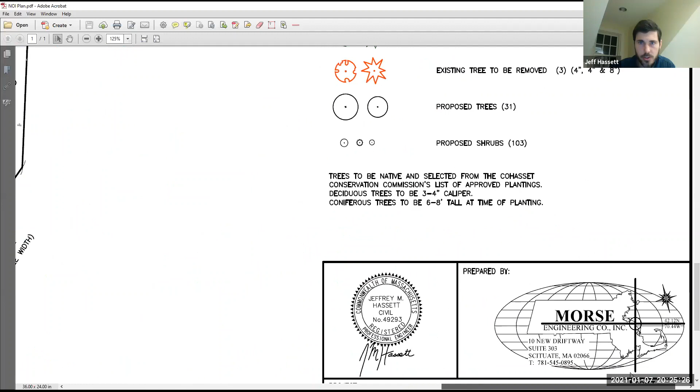Where is that outline, Jeff? Is that on the plan? It's above the title block in the tree legend here. Okay, back up at the driveway where you plan to extend it.

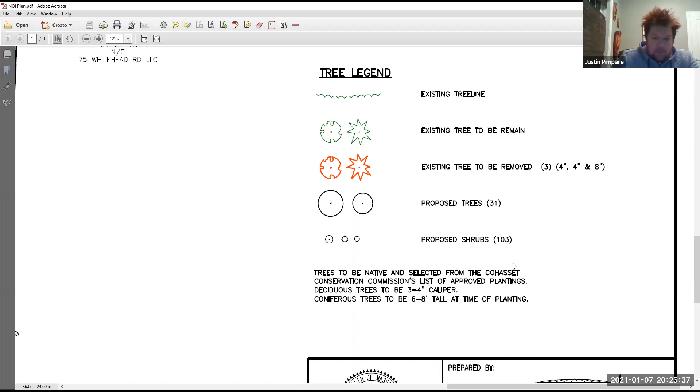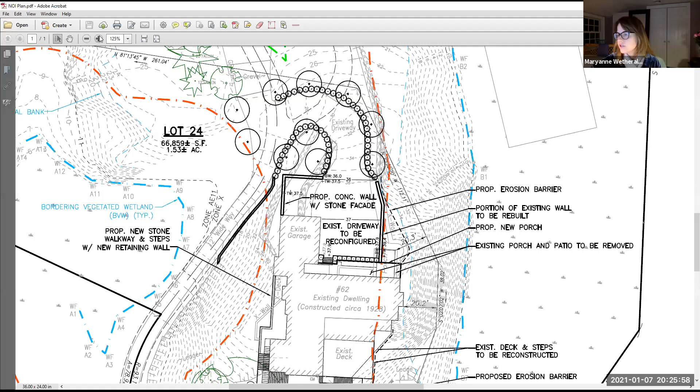I'm also very familiar with this property, having seen it before conservation and having looked at it for purchase, so I know a lot about it. Isn't that ledge where you're extending the driveway? Will you have to remove much ledge? I think that's ledge you're cutting into. No, this is not ledge - there are two boulder walls, one here and one here, and it's landscaped in between.

There's a photograph of that whole section if it's any help. It's on OneDrive - Maryanne, do you want to see the photo of that corner? Yes, okay, hold on one second. Jeff has it. Give me one minute while I find it, sorry I didn't have it ready.

So this area right here is where they're extending the wall out, into this landscaped area. So will it match with the garage, or what? Yeah, exactly, it's going to match that facade on the garage foundation. So then you're going to bring in fill - yes, that area as well.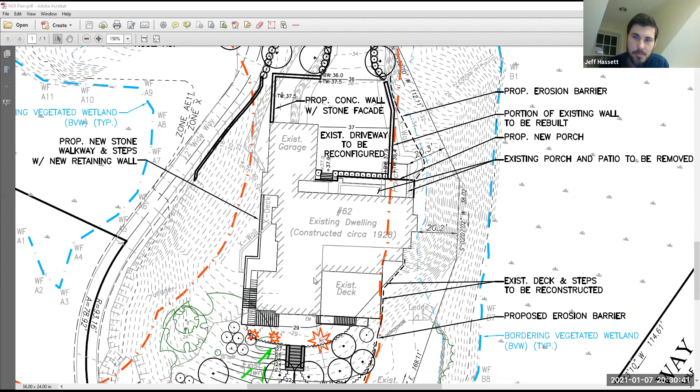Is that new or is that old? That's old. Okay, on the left? Well, when they built the garage, they would have put this deck in here, but the wall and the steps are old. Right, that's always been existing there.

So it seems also down below at the bottom of this rendering, you're putting in stone steps. That's all new too. So is that for stabilizing the bank?

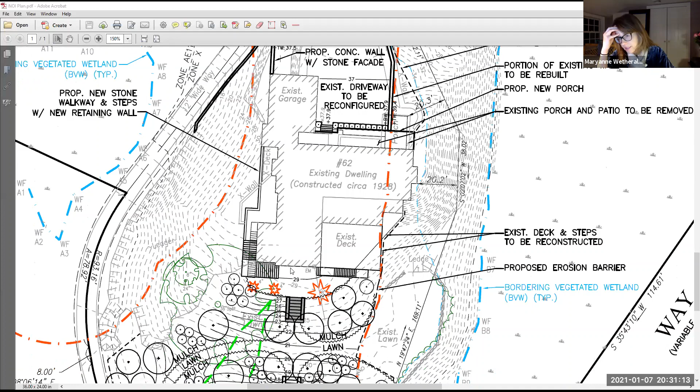Over here, these steps. Oh, that's all new. Yeah. Right, so it slopes off.

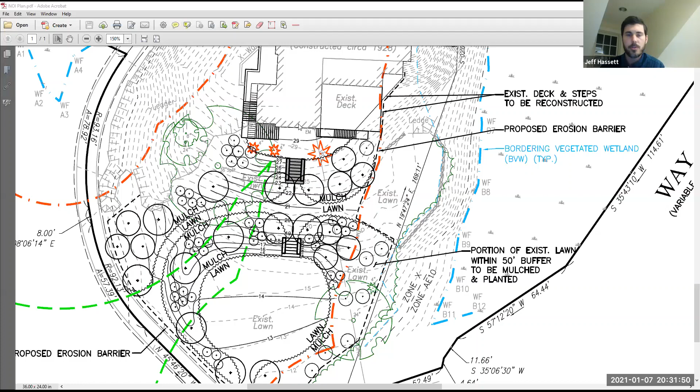They want to get a usable area down here where their child can play, and then convert the rest of it more to a landscaped area. So there'd be a grassed walkway coming across, and to get up to the house you'd have a flat area here, then steps up to a more level area, and then another flight of steps up to the house. So trying to make it more accessible.

Does it say the elevation right now is at 24 and you're going to level it down to 13 and 14? Is that what it says to the left, under exist lawn? No, the grading's not that substantial. You see here we have an existing 15 contour that's being lowered to 14 - you're taking it down a foot. The grading really is not that substantial.

So Jeff, as you've described here, you've got steps going up to a somewhat level area, and then not really level, there's still some contours there, and then going up to another set of steps to go into the house that way. Yeah, exactly.

Okay, I think our chair had asked the question whether there was work done in the 50. The answer was no, but looking at the plan here, there is work being proposed in the 50, and that's the portion of the existing lawn within the 50 to be mulched and planted. Right, no grading in that area, but it will be converted to a planted area - no grading, just mulch and plantings.

Can you talk a little more about those plantings, what they are or what they would be? There'll be bushes, and the landscape architect has not picked the species at this point, but they will be native.

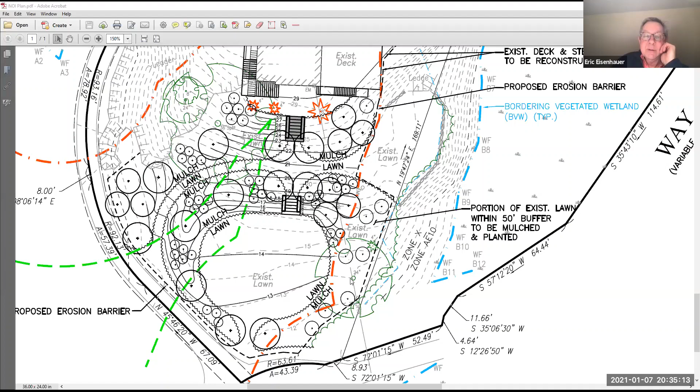Jeff Summers, could you put the photo up of the bays, please? Yeah, I think I have the photos. Yeah, hold on a second. I think that tree is there, though.

So it doesn't quite go all the way over, but yeah, there's a tree on the right there. There's a large tree. Is that the one we're referring to? Yeah, that's the tree that I show.

This one here, yeah, along with eight other stumps. It looks like it's moved more to the left on the rendering. That's okay, I may be mistaken.

And Jeff, the only other question I had was about the removal of the deck to take it out of the 50-foot buffer zone. You said you'd stabilize that area within the buffer zone—would that be part of the planting plan, or will you include your plans for that? Yeah, I can add that information. Okay, great.

Anything else, everybody? Are we all set?

Jay, do we have to put in a variance for the plantings in the 50 with the mulch? Well, I mean, personally, I'm only one vote here, but I don't feel comfortable taking a decision on this project tonight. I'd personally like to see a landscaping plan. We're not just talking about specific species or one or two trees here. I'd feel more comfortable continuing the hearing and seeing more detail with respect to the planting on this project.

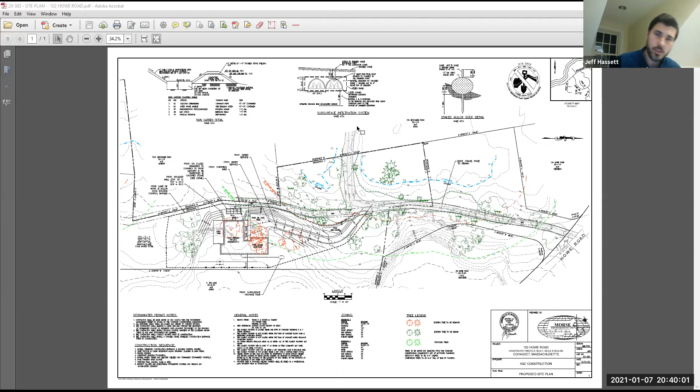It's 5.5 acres in size with frontage on Howe Road. So Howe Road is here, and it's undeveloped with the exception of an existing gravel driveway, which I'll zoom in on. The gravel driveway runs here, then continues to the back of the property, but it turns and goes to this property, 726 Jerusalem Road Drive. There are sewer and water services within that driveway.

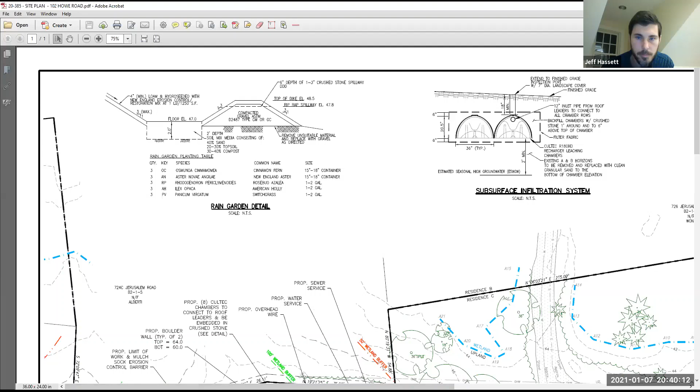So zooming in on it. Jeff Summers, your comments please. You're muted, Jeff. Oh, you're muted, Jeff. There you go. I don't think we were done with the presentation first, though. No, we're not. No, I'll elaborate on this. So I hope not. You stopped, Jeff. Was that enough? You're back.

So this is the existing gravel driveway coming off here. The proposed work would be to bring a proposed driveway off of that, and we are seeking a waiver for only this small portion of the driveway, about 33 square feet, where the proposed driveway connects to the existing driveway. You have wetlands and the 50-foot buffer here, so again, that corner. Beyond that, it's a paved driveway with water and sewer services up to a proposed house.

There are utility poles with overhead wires within this way, so we're pulling an overhead electric service from the pole here directly into the house. This work area is only about 19,500 square feet in size, so it leaves 5 acres of the property undeveloped, about 91% of the property. In this area, I believe these 8 trees are the only mature trees that need to be removed. In the work area, there are also 4 mature trees here that will remain.

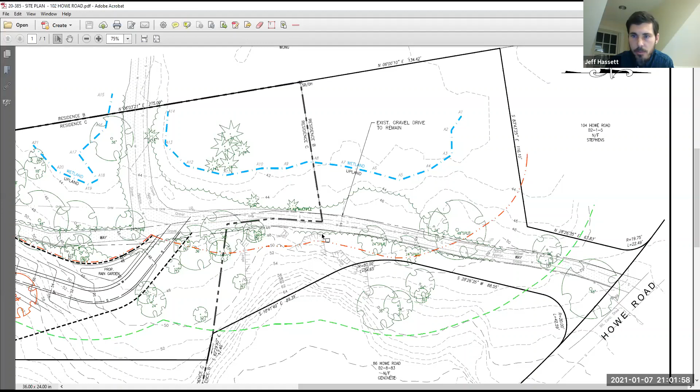But I believe residence B and C are the same owner. Garrett? Well, yeah, yeah, they're the same owner.

Okay, Jeff, as you look at this, when you bring gravel in and you want to dump your gravel in the 50-foot zone, do you put it at the crossroads, or are you going to have to do it down two-thirds of the length of the driveway that's in the 50-foot buffer zone? How do you see that happening?

Like when deliveries are made of material? No, it's your project. I mean, we have a prohibition on bringing material into the 50-foot buffer zone, so you're going to have to deal with it, or we are.

And you talked about that crossroads having a problem with the 50-foot. But if you look at the length of the driveway, someone's going to have a problem all the way along the length of that dirt track trying to bring in material. Yeah, not just that one area, because you're not going to get your big trucks in on this mud path.

Can I just make a comment concerning the driveway? Yes. So in the Wetlands Protection Act, there are certain activities which are considered minor activities and aren't subject to regulation, and one of those concerns driveways. It says the repair or replacement of an existing and lawfully located driveway servicing not more than 2 dwelling units is exempt, provided that all work remains within the existing limits of the driveway and all surfaces are permanently stabilized within 14 days of final grade. So that's exempt, Jeff.

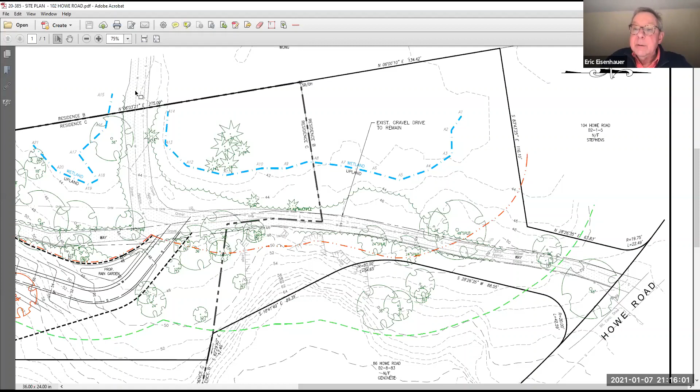Okay, so right now we have the house staked out. In addition, we'll stake out the limit of work, and we'll give the 50-foot buffer through that area as well.

I had difficulty finding where the house was marked. I saw some markers, like ties to trees, but it was difficult for me to see all that. Yeah, without a plan showing you exactly where the points are, it would be difficult. There's too many trees on the ground to see where the markers are, Marianne. That's why I needed something to help me through the brush as I was starting to fall.

I can do a site visit at the end of the week or the following week after. I would suggest the following week so we can get it surveyed. I prefer next week. Oh, I can't do that. I think we have to find out when the survey is going to be completed by, and then we work off of that date.

Jeff Summers, what would be a suitable time frame for you to schedule something like this? Could we schedule it for maybe Thursday or Friday of next week? When you say next week, the coming week? Yes. I can't make it. Is that the 21st or 22nd you're expecting? I was actually suggesting the 14th or 15th, but why don't we push it out a little further?

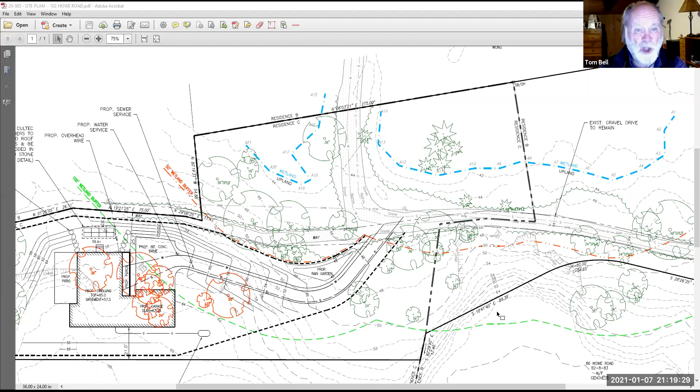Yeah, I did it, it's only 300 feet, it's not far. Yeah, I agree, Tom.

Okay, so Jeff Summers, if we're going to have the site visit on the 19th, when do you want to continue this hearing till? Let's continue it to February 4th. Okay, all right.

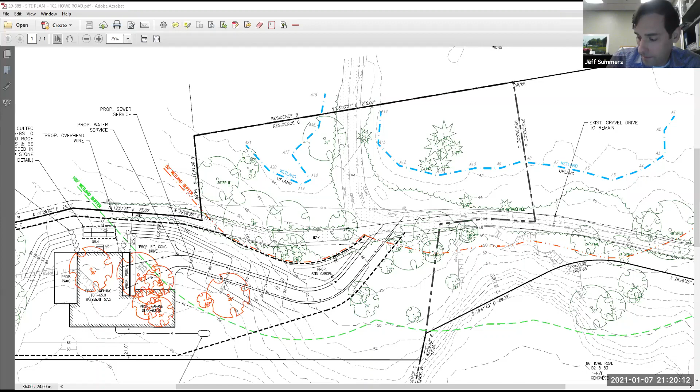Jeff, could you do us a favor and send out an email tomorrow with the days and times of the site visits, and the day we're going to have the review of the project, whether it be the 21st or the 4th or whatever? So we'll have something in writing, please. Okay, great.